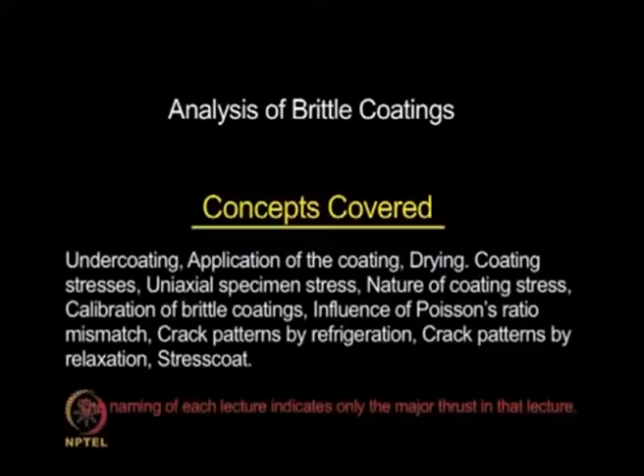Let us continue our discussion on brittle coatings. We saw one of the earliest brittle coatings was naturally formed scales on hot rolled steel. Then we also saw even the oxides formed on surfaces were used as a brittle coating, but primarily those coatings failed to indicate the presence of plastic deformation in the component. Only later, with advancement in material research, people developed sensitive coatings which fail at strains much below the yield strain, about 2000 microstrain. So people developed coatings which can fail even at 300 microstrain.

In all the coating techniques, you need to follow a specific procedure for bonding the coating over the specimen surface. So in the last class we saw the steps in performing a brittle coating test. The first step was to select a suitable coating. The second step was how to clean the specimen surface, and now we will see the third step: to provide an undercoat. What is the use of this undercoat?

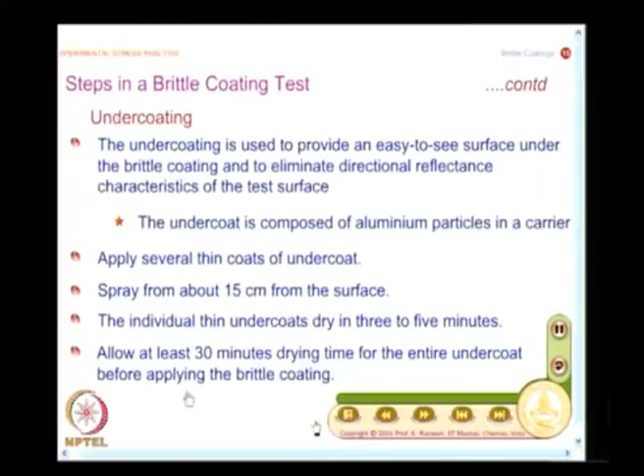What you will have to keep in mind is, though these procedures look very detailed, this has come about by several iterations performed by the manufacturer, and it is better that you follow these recommendations. Also keep in mind that when you prepare the undercoat of the model, you must keep a number of calibration specimens, spray them with undercoat, and allow them to dry in the same environment.

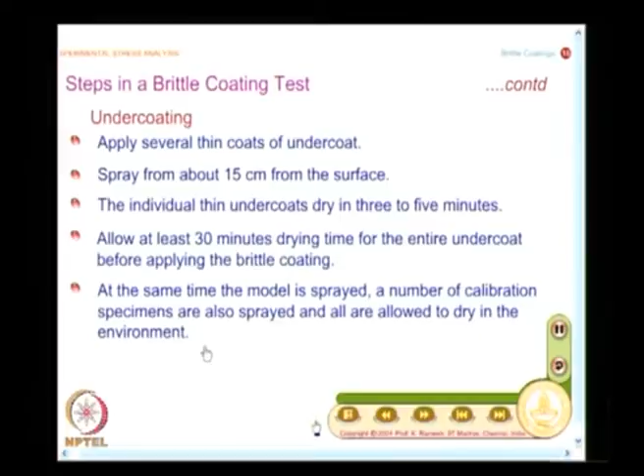Because in all these techniques calibration is equally important. Unless I find out the failure strain of the coating for each test, my data interpretation becomes difficult, and this you have to keep in mind.

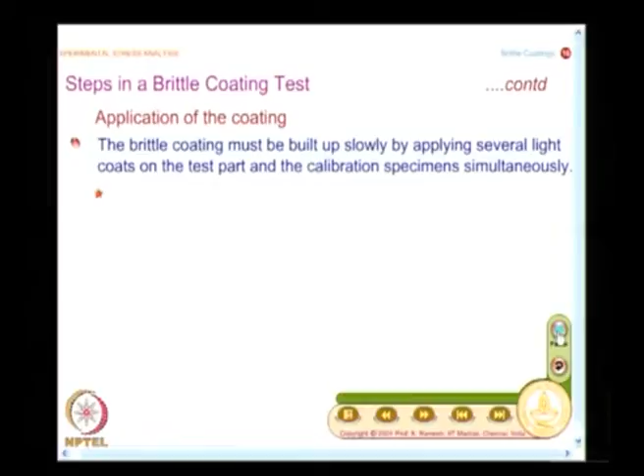After undercoat, now you get on to application of the coating. How do you apply the coating? You have to build up the brittle coating slowly by applying several light coats on the test part and the calibration specimen simultaneously. So you are also taking care of preparing good calibration specimens which are identical to the way that you have prepared the model.

Like the undercoat, each coat should be applied in one spray pass, and you should also do this quickly and with a steady hand from a distance of about 15 centimeters. So the spraying technique is very similar to the undercoat, and after each spray you must allow 1 minute drying time to allow for solvent evaporation.

The reason is also given: after every coat you must allow sufficient time for whatever you have applied to dry. You find that undercoat requires a little more time for drying, about 3 to 5 minutes, whereas the actual brittle coating takes much less, just 1 minute. All this information is very important to follow, because unless you allow the solvent to evaporate, the next coating you apply may not stick properly, and smudges may take place. So that is the reason why you have to observe these types of procedures.

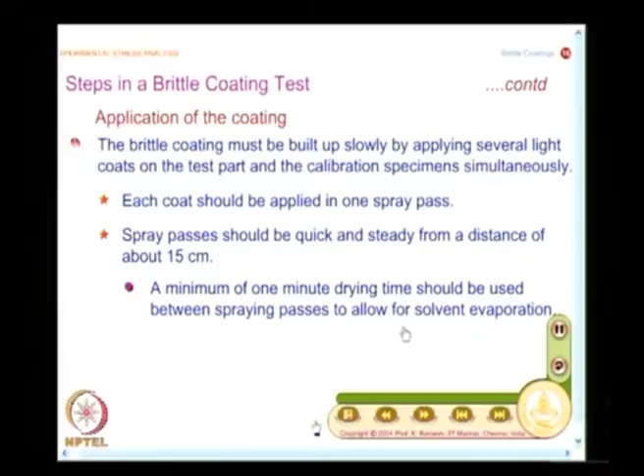You will have to be careful when I say 1 minute, because for each coating the environment is also very important. Suppose you apply the coating slightly below the design temperature or above the specified humidity, more solvent release time must be used. So you must assess for the given environment whether you are in a position to establish that you have provided sufficient time for solvent evaporation.

So it is more like an art, you have to develop this, be sensitive to what is happening, and then apply the coat uniformly.

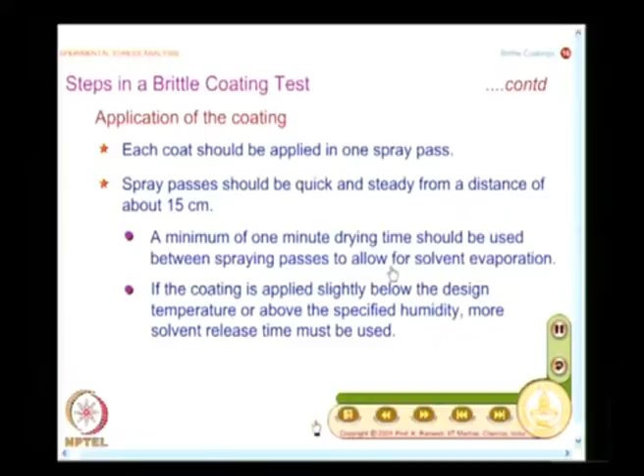And what are all the problems that you can come across? You want the coat to neither be applied so wet or thick that it runs, nor so dry that it appears dusty. So it has to be in between, totally wet and totally dry.

And what will happen if you have excessive coating thickness? The excessive coating thickness may cause sagging, running, and trapping of large air bubbles. This is very important. When you are applying a coating, you must ensure it is uniformly applied with no air bubbles entrapped, so that the strain of the prototype is faithfully transmitted to the coating. I want a uniform thickness, because only then will my quantitative estimation become meaningful.

When you are putting a coat, the first coat may not cover the surface evenly. So you do not have to worry about it, because you are going to apply the coating by several passes of spray, and the subsequent coats should even out the coating. So when you do the first coat, just follow the procedure: keep it at 15 centimeters away from the specimen, make one pass like this, allow it to dry, and after several passes the coating will form more or less uniformly on the surface.

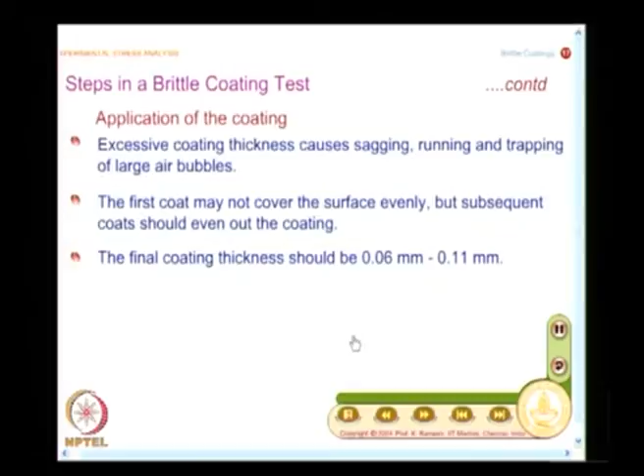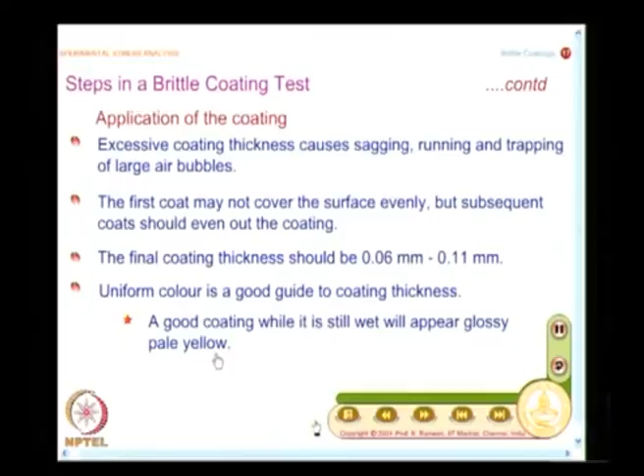And how do I assess that I have reached the final thickness? Color is very important, human brain is very sensitive to observing color. So if you have a uniform color, it is a good guide to coating thickness. What is stated is a good coating, while it is still wet, will appear glossy pale yellow, because you are now talking of a huge structure, not a simple cantilever beam used for calibration.

When you are having a huge structure, we must also have a mechanism to quickly check, so visual inspection is the first operation you can do. You can visually appreciate whether the coating is uniformly applied on the specimen surface.

The next question is, how do you find out the thickness of the coating? One way of looking at the thickness is to measure the calibration specimen thickness before and after the coating is applied. This is straightforward, because you are keeping the calibration specimen as part of your specimen preparation, so whatever operation you do for the specimen is evenly done for the calibration specimen. If you have done 5 passes on the actual specimen, you also do 5 passes on the calibration specimen. That ensures that by measuring the calibration specimen thickness before and after coating, I can find out the thickness of the coating on the actual specimen.

And in critical applications, it can be done on the actual test surface depending on the actual test part - you also have methodologies to help find out the thickness. And I said it is an industry friendly technique, so you do not necessarily apply the coating in a controlled laboratory environment. You may have light dust because of the environment, and this is acceptable - you do not have to be annoyed that you have a light dust. Suppose you have heavy dust, you also have a methodology to handle that situation.

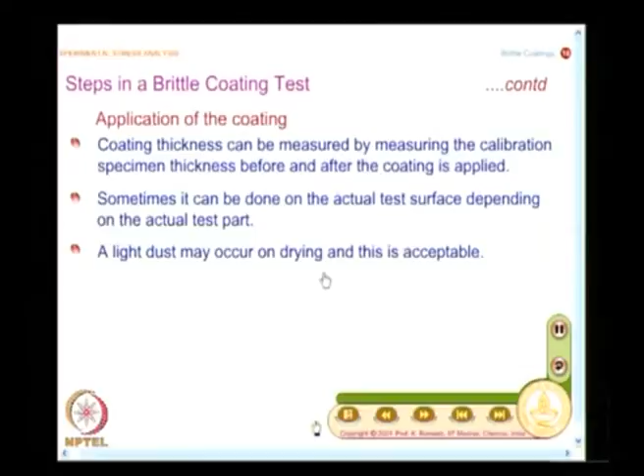When you face a problem, you always have a solution. Heavy dust is not acceptable, and you can dissolve it by rapid spraying of a 50 by 50 mixture of coating and thinner.

This is the beauty of it. When you look at the procedure, the manufacturer has looked at all aspects of applying the coating, because in all coating techniques, only if the coating is properly formed is data interpretation meaningful. This you cannot ignore. If it requires skill, then you need a skilled technician, or you have agencies which provide such facility. So you must pay attention to forming the coating very carefully.

There are also other minor recommendations: best practice is to apply the coating at about 3 to 5 degrees above the coating rating design temperature. This helps in curing.

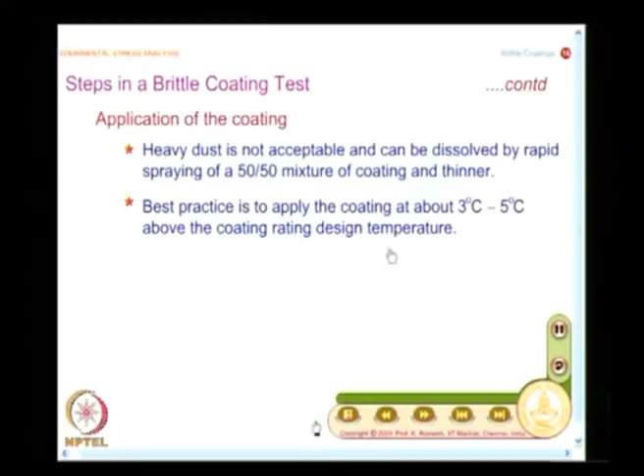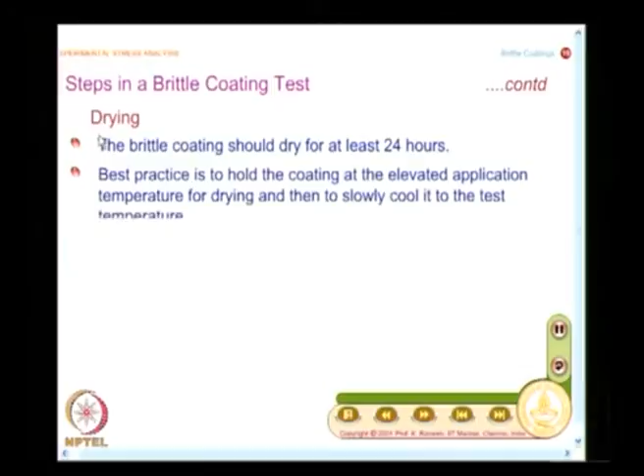The final process is, how do you do the drying? You should note that brittle coating takes 24 hours for drying. It is not immediate, whereas the undercoat takes about half an hour, whereas for the actual coating you must allow 24 hours.

There is also a suggested practice: best practice is to hold the coating at the elevated application temperature for drying, and then to slowly cool it to the test temperature.

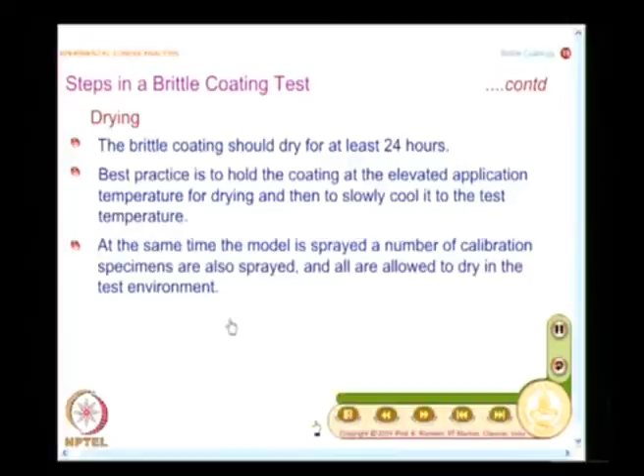As we have seen earlier, at the same time the model is sprayed, a number of calibration specimens are also sprayed, and all are allowed to dry in the test environment. So what you need to ensure is that you mimic a very similar process for the actual specimen and the calibration specimen. After this process, both the calibration specimen and the actual model or prototype are ready for your test, and now the data interpretation comes.

As I said when we were discussing photoelastic coating, for all coating techniques the basic equations are similar. So I am going to just show those equations for refreshing. They are the same set of equations, there is no difference, and the assumptions are also similar.

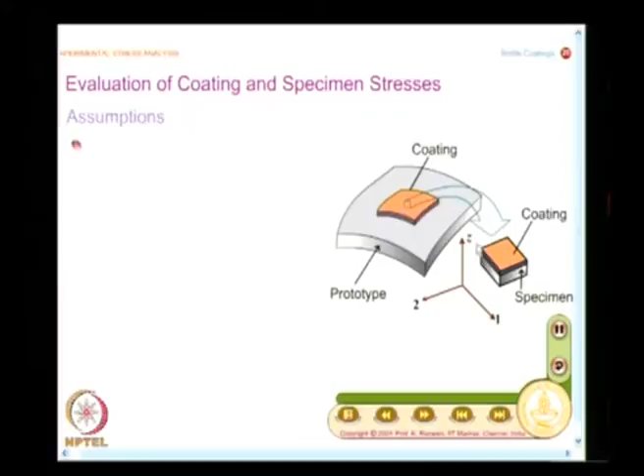So I have a prototype, I have a coating, and on the coating I select appropriately an axis. For convenience, I take axis 1 and 2, corresponding to the principal strain direction at the point of interest, and what we assume is the coating strain is equal to the specimen strain at that point. The adhesive is properly used to transfer the strain without loss or amplification. That is what is important - neither should it amplify nor should there be a loss.

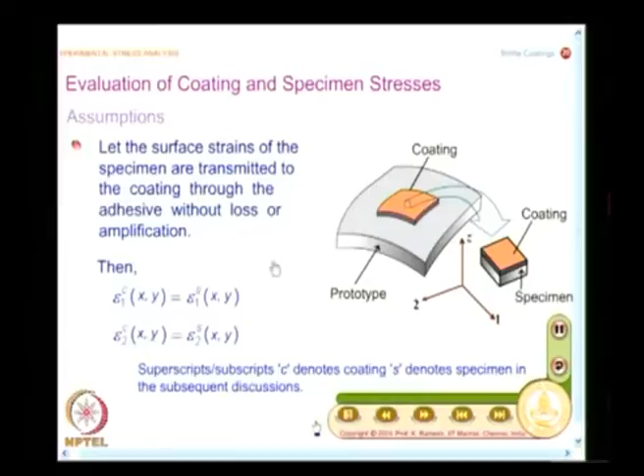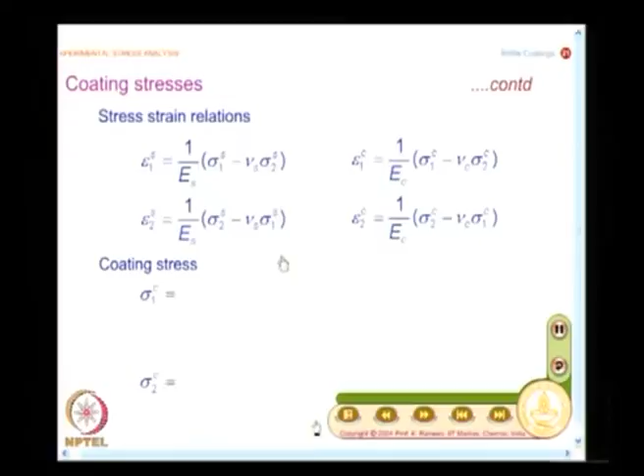We also looked at how to get the coating stresses. We had looked at stress-strain relations for the specimen, and we have also seen this for the coating, giving us the expression for coating stress. Now look at these expressions very carefully.

I have always been saying Poisson's ratio plays its spoilsport in all experimental techniques, and in this case a very special thing happens. Suppose my specimen is subjected to only a uniaxial state of stress. What do these expressions indicate? The specimen stress is only uniaxial, sigma 2s is 0, but what happens to the coating? By looking at these expressions, what do you infer? Suppose nu c is not equal to nu s.

When you have uniaxial specimen stress, I will have biaxial coating stress. Very interesting. I have always cautioned that uniaxial stress is simpler, whereas uniaxial strain is difficult to achieve in experiments. And I also caution, when I apply a uniaxial stress on the specimen, the strain would be either biaxial or triaxial depending on the specific geometry of the specimen under consideration.

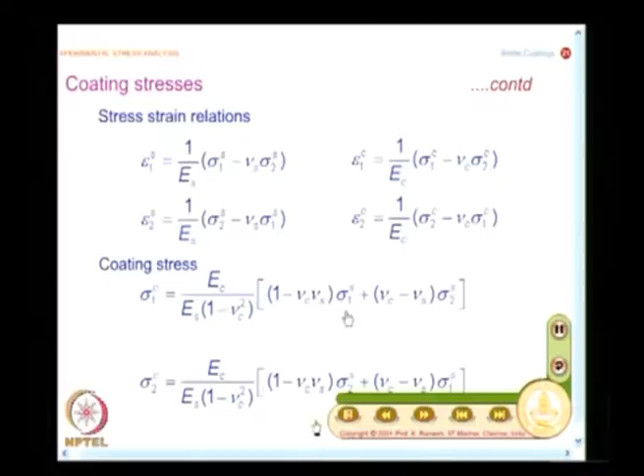My interest is to bring out and also discourage you from using brittle coating for quantitative evaluation, because left to myself, I will use it only for finding out the principal stress direction and reducing the channel, and you have to know what the difficulties are. So you find for a uniaxial specimen stress, I have a biaxial coating stress in general. Suppose I make the Poisson ratio equal, then I do not have this problem, but you have to appreciate this.

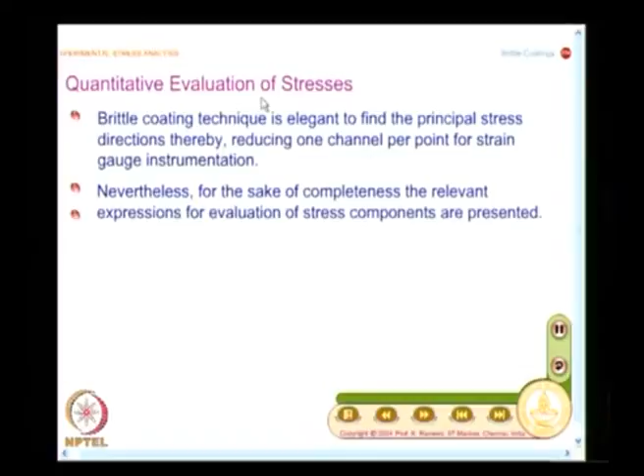Now let us look at how do I do quantitative evaluation of stresses, and this is what I emphasize again and again: brittle coating technique is elegant to find the principal stress directions, thereby reducing one channel per point for strain gauge instrumentation.

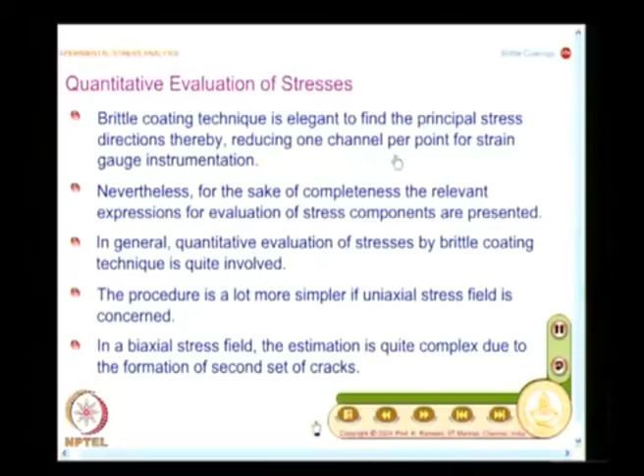I have already indicated that quantitative evaluation of stresses by brittle coating is quite involved. On the other hand, suppose I have only a uniaxial stress field on the specimen, the procedure is a lot simpler, and you have enough examples where uniaxial stress needs to be evaluated.

On the other hand, if the specimen has a biaxial stress field, the estimation is quite complex. We have seen in some examples one set of cracks, and another set of cracks formed perpendicular to it. When you want to find out the governing equations for what causes the formation of the second set of cracks, you have to bring in a lot of approximations and also information from the actual experimental situation. That makes the quantitative evaluation involved, not only involved, but doubtful in its accuracy.

I have already said brittle coating provides plus or minus 20%, we are not guaranteeing plus or minus 1%. So you have to consider that this is an industry friendly technique where the problem is very complex, even a small piece of information will go a long way in improving your design. So in a biaxial stress field, the estimation is quite complex, mainly because of the formation of the second set of cracks.

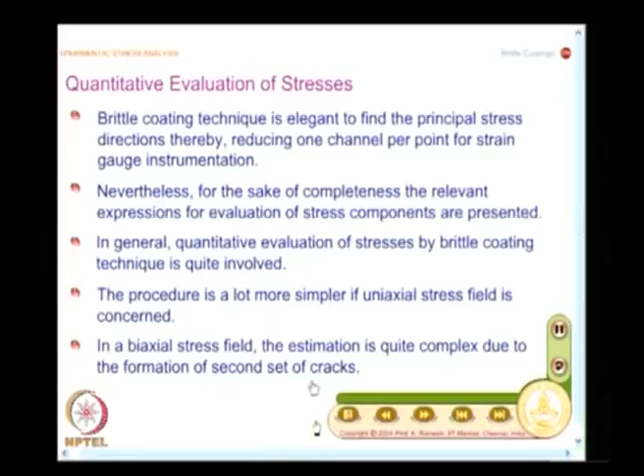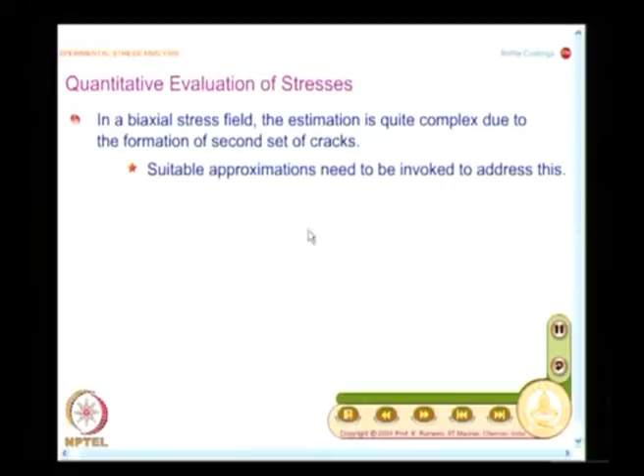What kind of information do you need from the experiment? First, you need to make suitable approximations. In addition, one may have to perform a strain gauge experiment at a few locations to find the factor governing the formation of the second set of cracks.

Because in the initial case, what we say is the coating is unperforated, I have a uniform coating, and being a brittle material, it may fail by maximum stress theory or maximum strain theory, whatever theory you want to use, and then the cracks form. But if you want to analyze the formation of the second set of cracks, you do not have a uniform coating, you have a coating with cracks.

So that is why you need to bring in an additional approximation, and you have to say there must be some kind of factor which governs this, which may not happen at the actual failure strain of the coating. There will be a factor, and that factor has to be determined experimentally. You need to make an additional experiment using strain gauges, otherwise you will not be in a position to do it.

My interest is not to get into the mathematical details, I am going to skip that, but I want to give you an idea of what kind of complexities are involved in quantitative estimation of stress magnitudes when you get into a biaxial stress field. That is where the focus is.

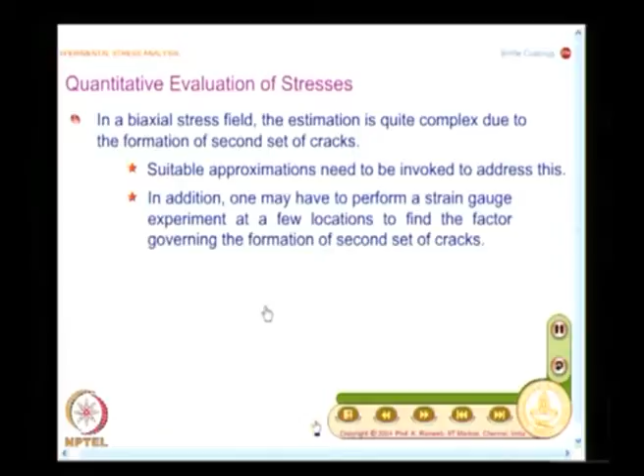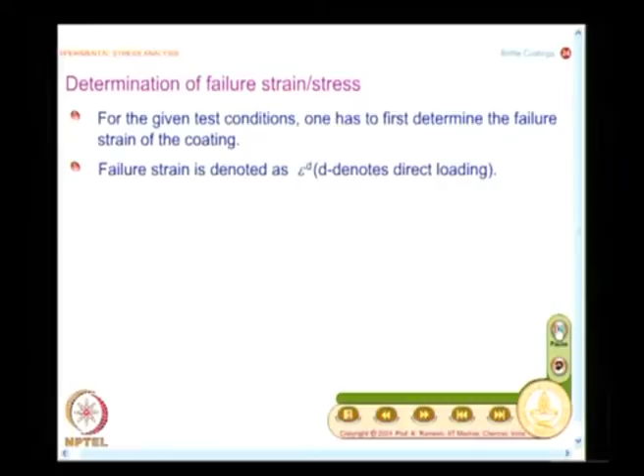What is the first step in the case of brittle coating? We have seen that in any experimental technique, you have to find out what is known as the calibration constant. In transmission photoelasticity, you had f sigma as the calibration constant that you need to find out. In photoelastic coating, you need to find out k.

Once you come to brittle coating, you need to find out the failure strain of the coating for the given test conditions. This is the basic information that helps you get the quantitative data, and you need to find out the failure strain.

For our discussion, we will look at direct loading. So to indicate that we are finding out for direct loading, the failure strain is denoted with the superscript d, which denotes that it is direct loading. I have said the cantilever beam is the best choice of specimen configuration used for calibrating the failure strain. Whatever coating you have, you find out the failure strain by coating a cantilever beam made of aluminum and then estimating it.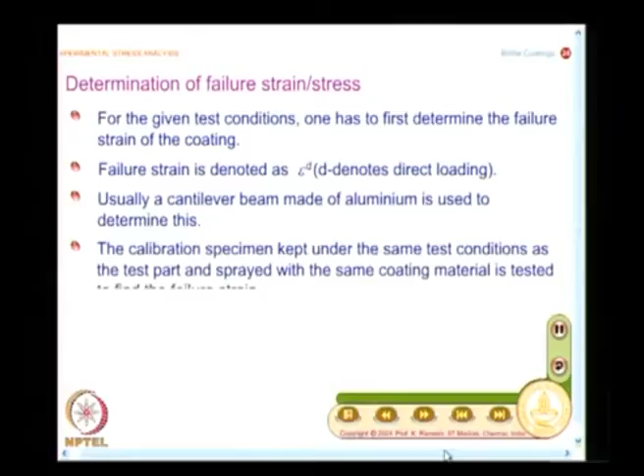We have already seen that the calibration specimen has to be kept under the same test conditions as the test part, and sprayed with the same coating material, and you apply the load and find out when the cracks form.

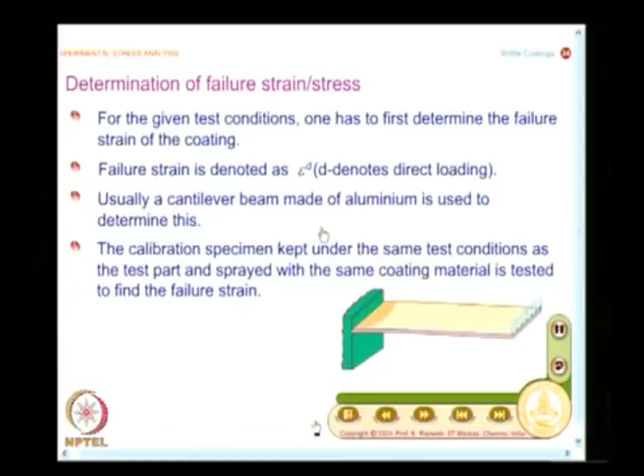Now we have to bring in several cases. I may do a calibration on an aluminum specimen, so that becomes the specimen for calibration. I will have Poisson ratio of the aluminum, nu A, then Poisson ratio of the coating, then Poisson ratio of the specimen, nu S. So I am going to handle 3 different Poisson ratios, and that is how the expressions will come.

If you look at sigma 1c and sigma 2c expressions which we have seen earlier, it is a play of that only. But what you need to keep in mind is, because I use a calibration specimen made of aluminum, and I have to do it on an actual test part whose material may be different, Poisson ratio mismatch is a nuisance. Let us see how this interplay of all these values works.

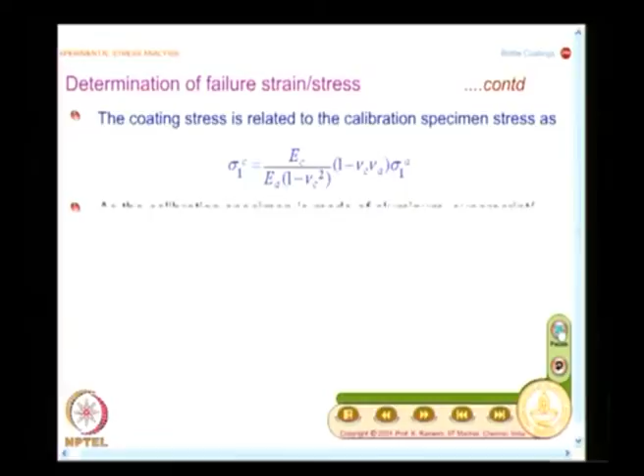From the expression that you had seen earlier, it is possible to write an expression for coating stress sigma 1c, and I am having only a uniaxial specimen stress. The same coating stress expression had 2 terms, one with sigma 1s and sigma 2s. Since I am using aluminum as the calibration specimen, instead of S as subscript or superscript, I use A.

So what I have here is the coating failure strain can be determined from this expression. The coating stress is expressed as EC by EA, 1 minus nu c squared, multiplied by 1 minus nu c nu A, into sigma 1A. We will modify this expression until we get the failure strain or failure stress and the corresponding stress in the specimen. It can be expressed in 3 different ways, and we will look at all of them.

Now I put a naught and say that this is the failure stress of the coating. From this expression I write sigma naught c equal to EC by 1 minus nu c squared into 1 minus nu c nu A into epsilon d. Because I have a uniaxial stress applied, sigma 1A divided by Young's modulus of the aluminum gives you the strain. So this is the strain for the formation of first set of cracks, and I had already cautioned that in the brittle coating test, the first set of cracks are the most critical one.

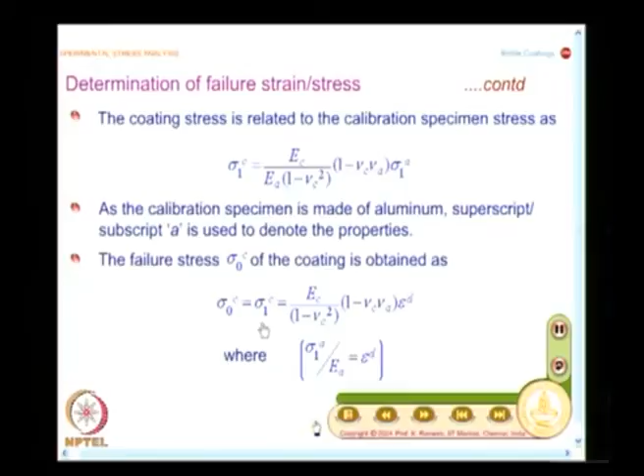So I have what is the failure stress. My interest is to go and show how this Poisson ratio mismatch can affect things. What I am going to do is also find out what is the corresponding specimen stress. When the coating fails, there must be some specimen stress for which the coating has failed, and I can bring in the Poisson ratio of the specimen and look at what way this affects it.

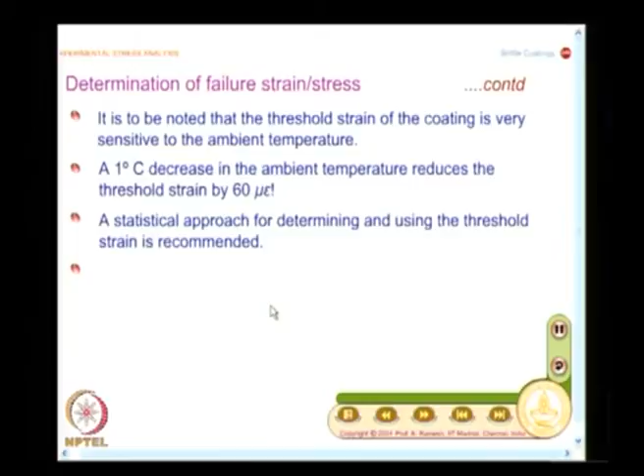You must also keep in mind the environment plays a very important role. What is reported is even a 1 degree centigrade decrease in the ambient temperature reduces the threshold strain by 60 microstrain - it is very large. When the temperature is lowered, the coating behaves more brittle. So you have to be very careful about temperature and identifying the relative humidity - these are very important. You must maintain that, and also look at the chart supplied by the manufacturer to ensure you have used the appropriate coating for a given application, and follow the recommendations.

What is recommended is a statistical approach for determining and using the threshold strain, because I may have to do several tests and find out from a statistical approach what is the failure strain of the coating. Even with all such precautions, the accuracy achievable for most of the time is estimated to be only plus or minus 20%.

This is more of a caution. You have to keep in mind that with all the precautions you do, you cannot get an accuracy better than plus or minus 20%. So that is the reason why I have always been saying, when you are asked to use a brittle coating test, use it more for finding out the principal stress direction, thereby reducing one strain gauge per point.

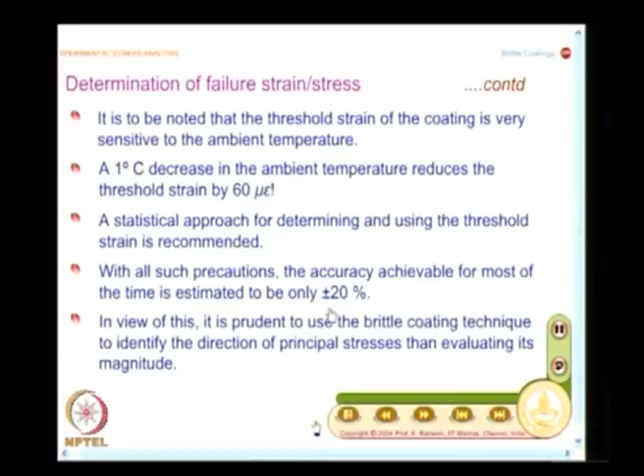So in order to establish that also I am showing you all this. Now after you see all this, even a 1 degree centigrade can affect the failure strain by 60 microstrain. So the quantitative evaluation becomes involved as well as not very accurate when you have this.

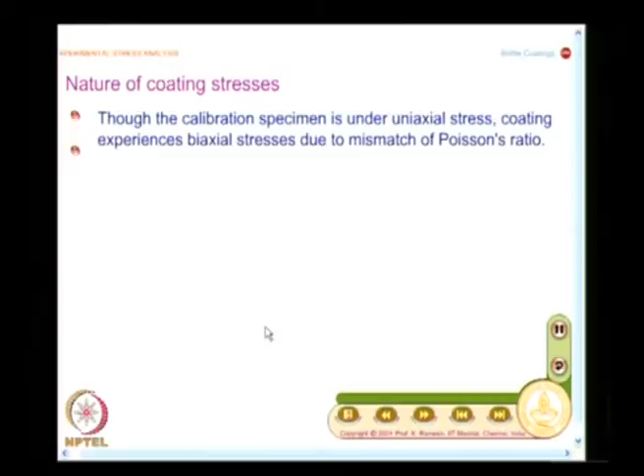I had already mentioned to you that even for a uniaxial specimen stress, the coating in general will have biaxial stress. That is what I am going to look at.

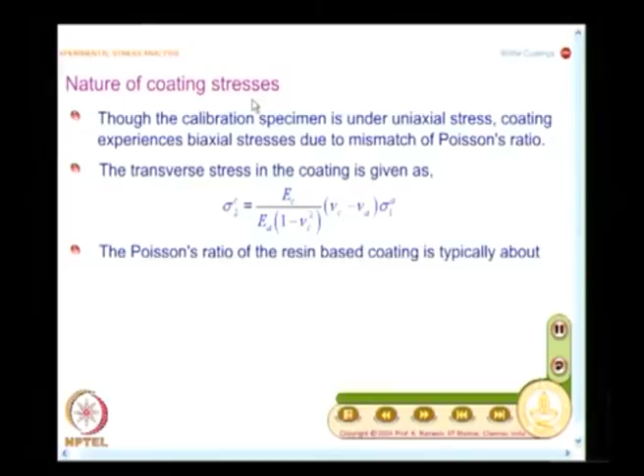From the expression we have seen for the coating stresses, you readily get, because the specimen used is aluminum, sigma 2c equal to Ec by Ea into 1 minus nu c squared, and you have nu c minus nu a into sigma 1a.

So, the Poisson ratio mismatch becomes important in brittle coating analysis. What is the Poisson ratio of the resin based coating? It is typically about 0.42. The Poisson ratio mismatch is appreciable when brittle coatings are employed on metals, where nu s ranges between 0.29 to 0.33. So, this is what you have to keep in mind.

Poisson's ratio mismatch has a role to play, and what we look at here is how the Poisson ratio mismatch shows up in your equations. One way of circumventing this is, at least in calibration, do not do it on aluminum, do it on the specimen on which you do the test. In that case, whatever I do on the calibration specimen can be easily related to the actual prototype.

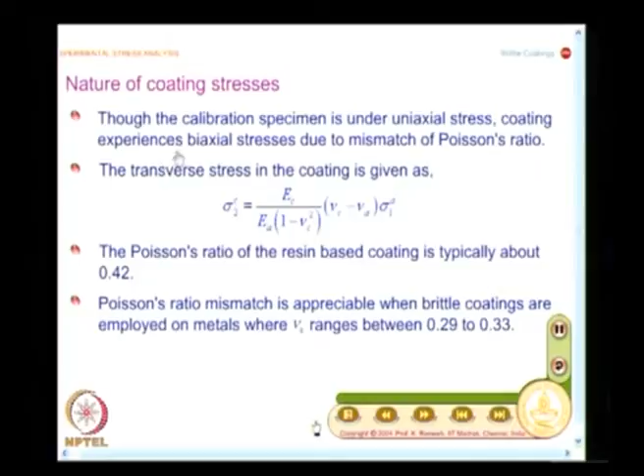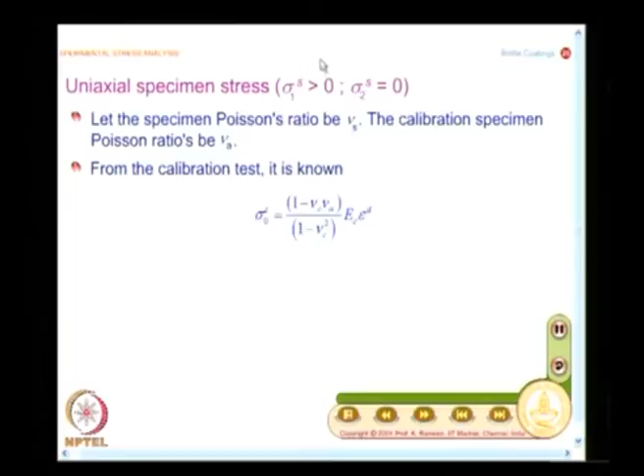Now, what we have emphasized is, for a uniaxial specimen stress, the coating experiences biaxial stresses. So, that is very important to keep in mind. The actual prototype also fails with only one specimen stress acting on it, the other specimen stress is 0. Now, let us look at how the interpretation can be done.

We have done a calibration test. From the calibration test, we have found out the failure stress of the coating, and that is written as 1 minus nu c nu a divided by 1 minus nu c squared, Young's modulus of the coating, into failure strain epsilon d.

I can also go back to my original set of expressions, like what we have written for the calibration specimen. I can recast the same expression with specimen Poisson ratio and the specimen stress. So, when I have a coating stress sigma naught c, I can also find out when the coating fails, what is the specimen stress that has caused it, given as sigma naught s. That is sigma naught c equal to Ec by Es into 1 minus nu c nu s divided by 1 minus nu c squared, multiplied by sigma naught s.

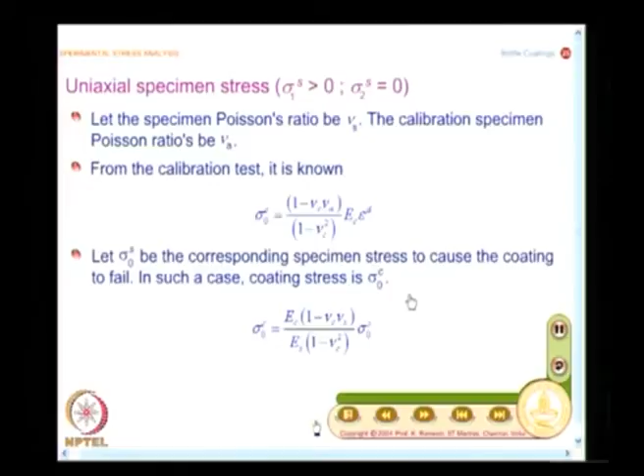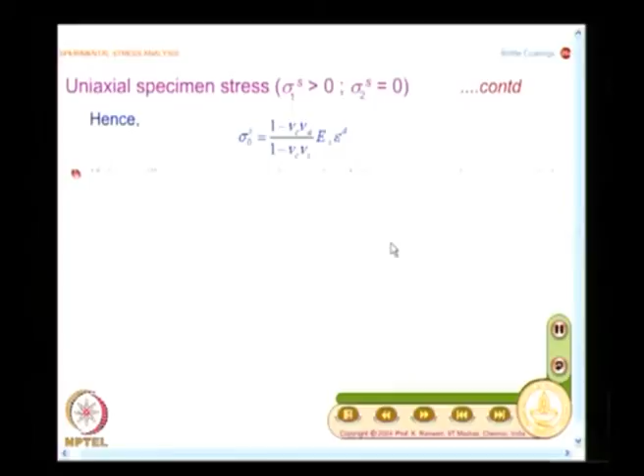Now, I can express sigma naught s in a different way, where I will find that if I use the specimen for calibration same as the actual prototype material, then my problem is less, and that is what is shown in this slide. So, sigma naught s is equal to 1 minus nu c nu a divided by 1 minus nu c nu s, into Young's modulus of the specimen, into failure strain epsilon d.

Now, this is simple to derive. I am skipping the mathematical steps, it is not difficult, you can go back and work it out, and this brings out the role of Poisson ratio mismatch. In this expression, you have Poisson ratio of the coating, Poisson ratio of the specimen, as well as Poisson ratio of the calibration specimen.

And I said you can reduce the problem by having the calibration specimen same as the specimen material. Then this equation reduces to sigma naught s equal to Young's modulus of the specimen into epsilon d.

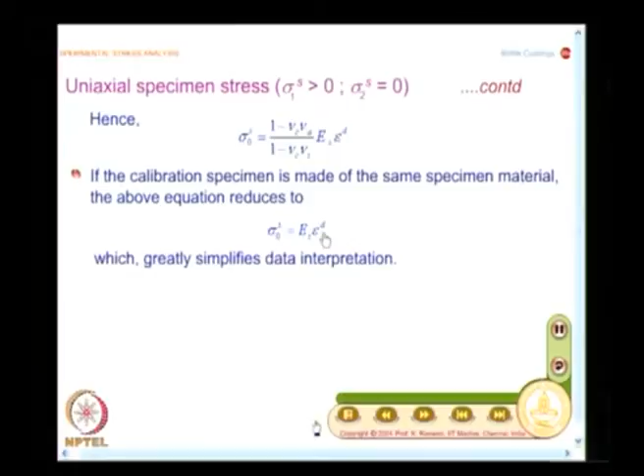This gives you a via media if you want less mathematical calculation. If you have a very important problem wherein you want to do this repeatedly, it is better to use a calibration specimen same as the actual specimen material. I have expressions for uniaxial and biaxial specimen stress, but those equations are very complex, so I will not get into those details.

Now we will look at revealing the crack patterns under different types of practical situations that we may come across.

When you are looking at design, you want to optimize and also prevent failure. If I want to develop the design to prevent failure, I am interested in finding maximum stresses and stress concentration zones, because there I would like to reinforce until I am satisfied it will withstand operational loads and any unforeseen exigencies.

On the other hand, when I want to go for optimization, I must also look for low stressed regions. You cannot ignore them, because you may have put in unnecessary weight over it, so I may have to identify and scoop out material from it.

So now we will look at how the brittle coating technique can be modified to reveal crack patterns in zones where you are not seeing cracks. This is the one situation we will look at.

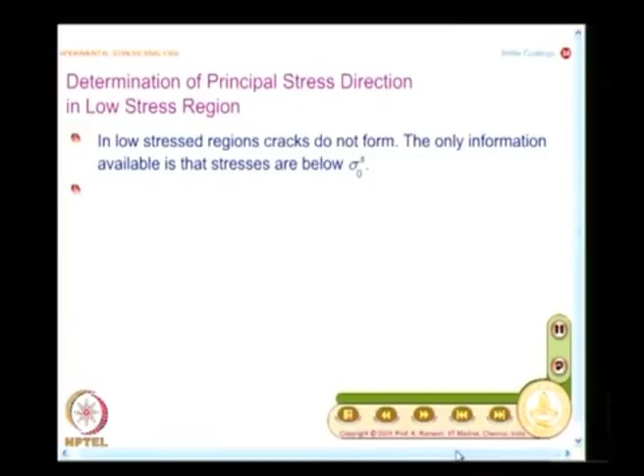So we are going to find out the principal stress direction in the low stress region, that is my interest, because when I want to do optimization, I need to scoop out material from low stress regions.

What you have is cracks do not form in the low stress region, and the only information you have in those regions is that stresses are below sigma naught s, because we have already seen there is something called the failure strain of the coating. We have also looked at the failure stress of the coating corresponding to the failure strain, and what specimen stress has caused the failure of the coating. We call that sigma naught s. So now we know from the appearance of no cracks that the stresses are below sigma naught s.

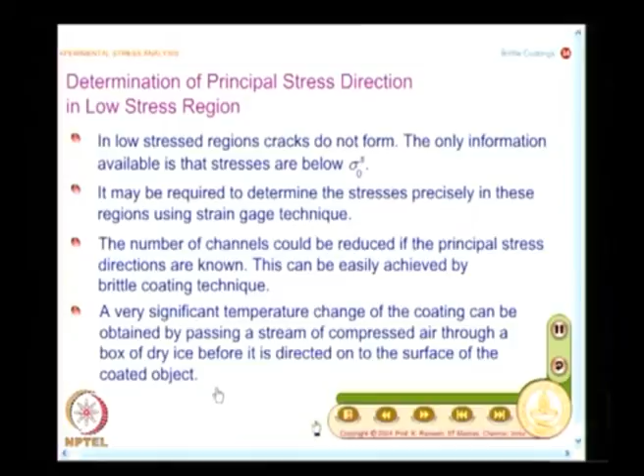The next points say why we need this. What you actually do is, a very significant temperature change of the coating can be obtained by passing a stream of compressed air through a box of dry ice before it is directed onto the surface of the coated object. So you generate cool air and then apply it.

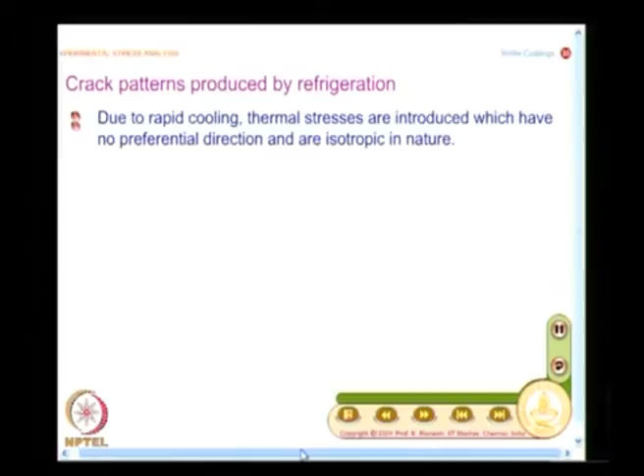So you generate a temperature field which is isotropic in nature, and that precipitates crack formation. The general level of stress increases. Due to rapid cooling, thermal stresses are introduced which have no preferential direction and are isotropic in nature, and the combined load and thermal stresses are sufficient to produce coating failure. So you are able to reveal crack patterns in regions which have not appeared earlier, and this approach is known as crack patterns produced by refrigeration.

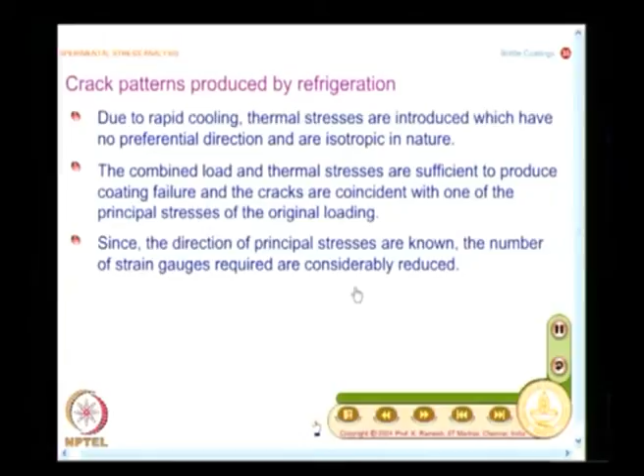Once you have got the cracks, the directions of principal stresses are known, and I can reduce the number of strain gauge channels. So it is a very simple extension of the basic methodology of brittle coating.

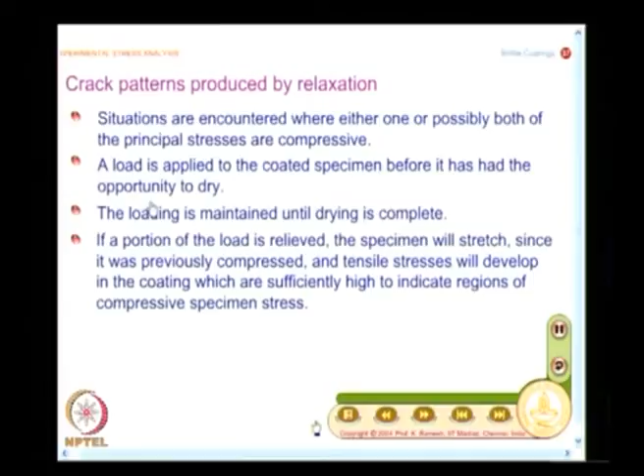And what do I do for compressive stresses? You apply the coating differently. This is known as crack patterns produced by relaxation: you load the specimen first. A load is applied to the coated specimen before it has had the opportunity to dry, and the loading is maintained until drying is complete.

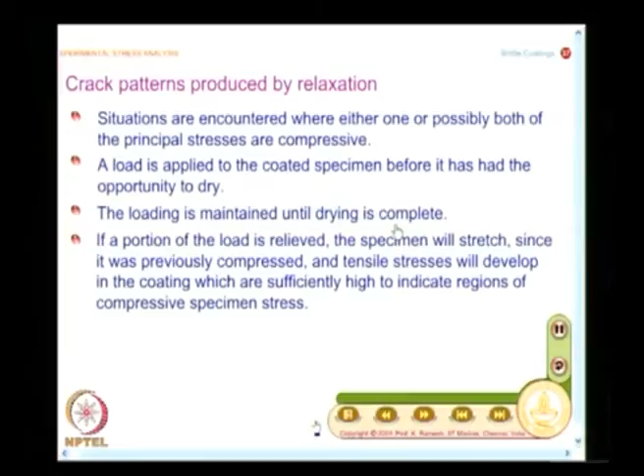So what happens when you release the load is whatever stresses were compressive will behave like tension, so cracks will form, very similar to what you saw in direct loading.

Then you can mark those, but these are very difficult experiments. A.J. Durelli and his co-workers have very carefully demonstrated all these techniques, and they were also very successful in recording crack patterns in problems like a ring under diametric compression, which is essentially a compressive load applied. They have also shown that whatever isostatics you get for these two cases, when you have formation of a second set of cracks, you get contours corresponding to the first set as well as the second set, and they showed experimentally that the principal stress directions are mutually perpendicular.

You have only heard from mathematics that the principal stress directions are orthogonal, you have not visually seen it. Even in photoelastic analysis, I only get contours of isoclinics, not contours corresponding to sigma 1 and sigma 2 to check if they are mutually perpendicular. Whereas in brittle coating, you can get one set of isostatics because sigma 1 has reached the failure strain of the coating, and another set where sigma 2 has caused cracks. These demonstrate two families of isostatics that are orthogonal everywhere, giving experimental proof that principal stress directions are mutually perpendicular - that is the advantage of brittle coating.

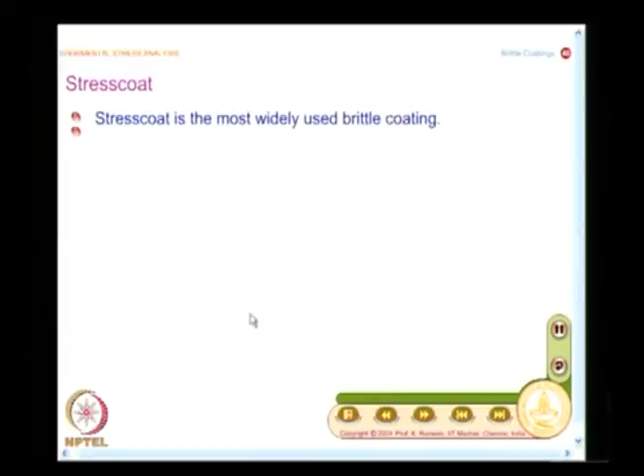What is the type of coating available now? You have what is known as Stresscoat. I said initial coatings were naturally formed coatings, then the first manufactured coating was a mixture of shellac and alcohol, and now widely used is Stresscoat. It consists of 150 to 300 parts by weight of carbon disulfide, 100 parts by weight of zinc resinate base, and 0.5 to 30 parts by weight of dibutyl phthalate as plasticizer.

Plasticizer is very important, you need to handle it carefully. The plasticizer added does the job of controlling the strain sensitivity of the coating. If you do not plasticize the coating, it will tend to craze, meaning spurious crack patterns will form. So you need some plasticizer, but if you add excessive plasticizer, the cracks once formed will close upon release of the strain that caused the crack formation. You cannot remove it completely, you need a minimum quantity which is a function of your requirement, and you can also control the strain sensitivity this way. Initial coatings were highly stressed and only cracked under high strain, but later coatings with developments in material research fail between 300 microstrain to 3000 microstrain - all done by modifying the constituents to suit requirements.

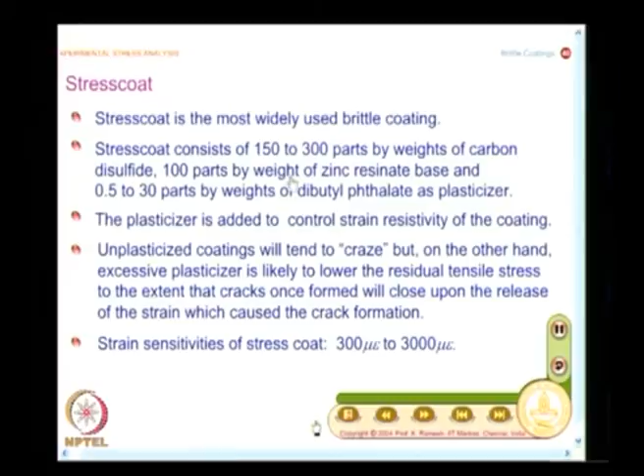You should also keep in mind, strain sensitivity is a function of environmental temperature and humidity at the time of the test, which we have seen when discussing calibration, and plasticization should be appropriately controlled. You have to handle the plasticizer very carefully.

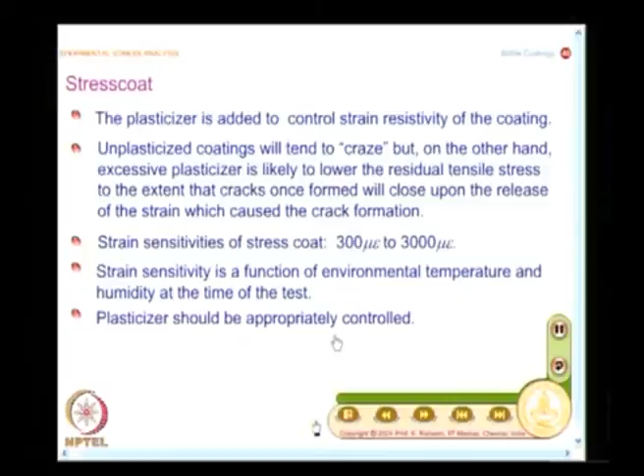So what we have seen in this class is a decent appreciation of what brittle coating technique is. We have looked at the conditions for formation of cracks. We have emphasized that for a uniaxial specimen stress, in general the coating experiences biaxial stress, which makes interpretation and application of failure theory complex. Like in photoelastic coating, here also you have to do a calibration based on the failure strain of the coating. We saw we can find the failure strain of the coating, express it as failure stress of the coating, and find the specimen stress which causes failure of the coating. We also looked at the interplay of Poisson ratio of the coating, the specimen, and the calibration specimen - you have one problem less if you make the calibration specimen the same as the actual test material.

Then we also saw how to generate cracks in regions where you do not see cracks in the initial test, which can be done by refrigeration. Finally, we looked at problems where you apply compression - how do you reveal the cracks, which can be done by relaxation technique. We also saw the material available now for brittle coating, labeled as Stresscoat, a commercial name, and that brings us to a close of what is brittle coating.